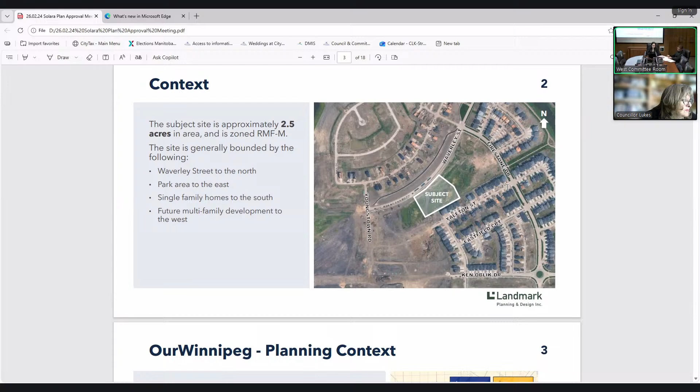Regarding some planning context, OurWinnipeg 2045 and Complete Communities 2.0 identified this site as a recent community, and there are several policies and objectives that support a project like this one. For example, expanding housing diversity while improving the efficiency of land use, infrastructure, and services, and encouraging residential development that contributes to the neighborhood character, among others.

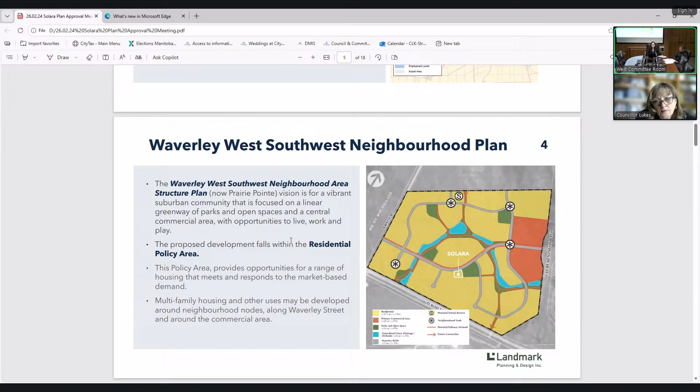This site is also located within the Waverley West Southwest Neighbourhood Plan area, within the residential policy area. I'm not going to get into the specifics for the interest of time, but the proposed development follows the policy for this area.

Now, regarding the site plan, the proposed development includes 12 townhouse buildings with a total of 59 dwelling units, all with single and double garages depending on the size of the unit, and an overall parking ratio of 2 parking spaces per unit. There is also an outdoor amenity area located in the center of the development, with enhanced landscaping and connectivity all across the site. We're also proposing a total of 9 visitor parking stalls, 4 of them accessible stalls.

All of the proposed townhouses are 3 stories in height. The ground floor is dedicated to the private garage for each unit. Vehicle access to these garages is provided directly from the proposed internal road loop, which keeps driveways and vehicle movements contained within the site. The main entrance to each townhouse is located on the opposite side of the unit from the garage, so these front facades face the internal pedestrian network.

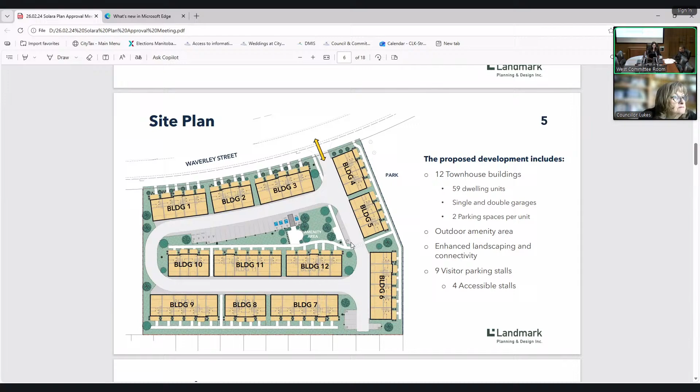Here we can see a zoom into the amenity area in the center of the development. We can see the common parking area, a space for 20 bike stalls, and a seating area as well, all connected with pedestrian paths.

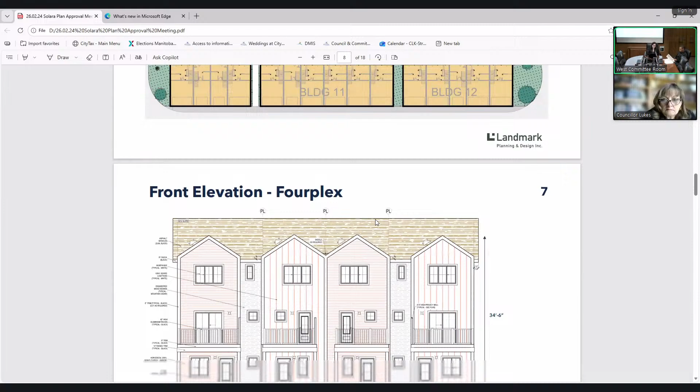Now, this is a typical elevation. This is for a fourplex, but it's very similar for fiveplex and sixplex.

The facade design incorporates durable and cohesive materials, including vinyl board and batten siding in white and earth tones, engineered wood siding in a cedar finish, black trims, black asphalt shingles, and 42-inch aluminum railings with glass panels for balcony areas, ensuring a modern appearance that is consistent across the development.

Also, for all the buildings, the proposed height is just over 34 feet. This is the front elevation. Here you can see the pedestrian access at the ground level, covered by a balcony deck in the second level, which is where the social areas are located, and then followed by a third level with 2 or 3 bedrooms, depending on the size of the unit.

This is an example of the rear elevation, where we can see the garage access at the ground level.

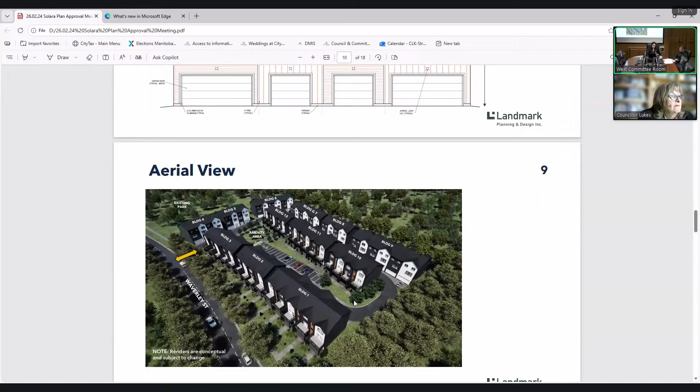And then the following slides show very conceptual renderings, just to give you an idea of the scale and general layout of the development. However, in this case, the surrounding context has not been detailed. This rendering helps to appreciate the height of the buildings, the road loop, the central amenity area, and direct pedestrian connection between the front units and the sidewalk along Waverley Street.

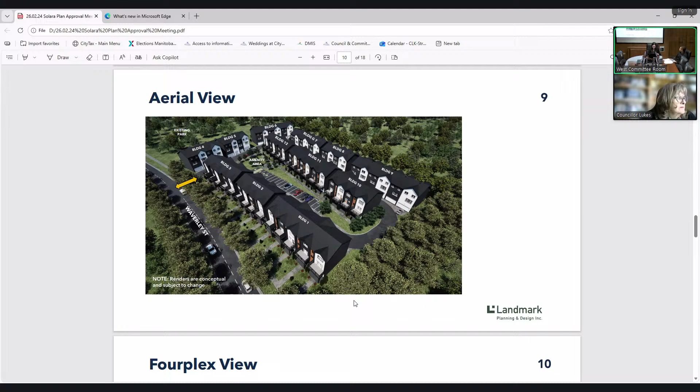This is a typical fourplex view. Here we can appreciate the combination of colors in the facade, the rhythm, the landscaping surrounding the entrance of each unit, similar for the fiveplex and the sixplex.

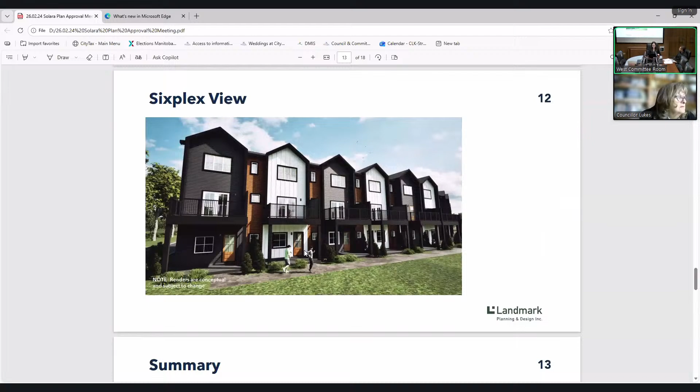So in summary, we feel this is a good proposal for the Prairie Pointe neighborhood. It adheres to objectives and policies of the city, is consistent with the vision and character of the surrounding neighborhood, introduces a housing form that expands the range of residential options in the neighborhood, responds to identified market needs and demand, and improves the public realm and strengthens access to adjacent neighborhoods through a pedestrian network.

And with this, I conclude my presentation. Thank you for your time. If you have any questions, we're happy to answer them.

The timing would suggest you've done this before.

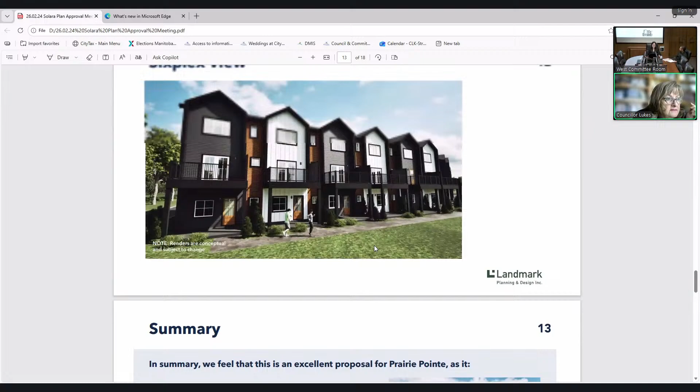Any questions from committee at this point in time? I'm just recapping the amenities section here. So what is it? Primarily like a little park, seating area, bike parking.

Yes, that's correct. The seating area with also an area for bike stalls and landscaping, trees, shrubs around it, connected with the pedestrian paths. Also, this path connected to this area crosses the street. The path continues and it takes you to the park to the east of the development. Right, which we can see.

Okay, no, I'm familiar with what you're wanting to do, and you've got little amenities in there. You've got good pathway connections to the park. It's nice design. Yeah, no, I don't really have any further questions.

This is exciting because it's another multifamily development in the Waverley West Ward. That is the fastest growing ward in the city right now. So, yeah, no, this is, I have no more questions.

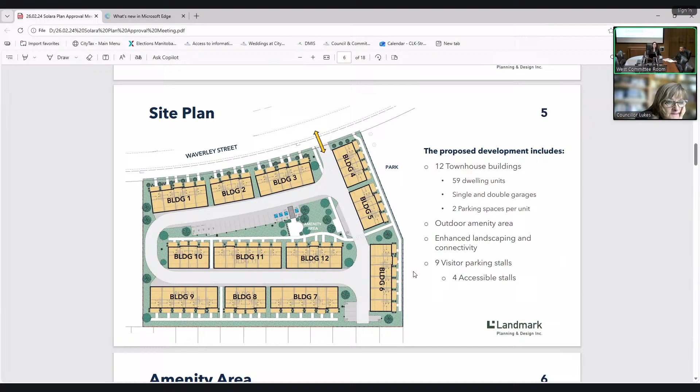Thank you. Councilor Dobson, one question. Does every building have a balcony? Yes. And they're all on the second floor? Yes. Okay, so they're not imposing on the neighborhood property because they're not very high.

And all the parking is not on the balcony side. Underground parking? It's not underground, it's ground floor parking, but it's a garage, just on the ground floor level. So in here we can see this is the ground floor level and these are the garage entrances.

Yeah, looks very good. Thank you. All right, no questions.

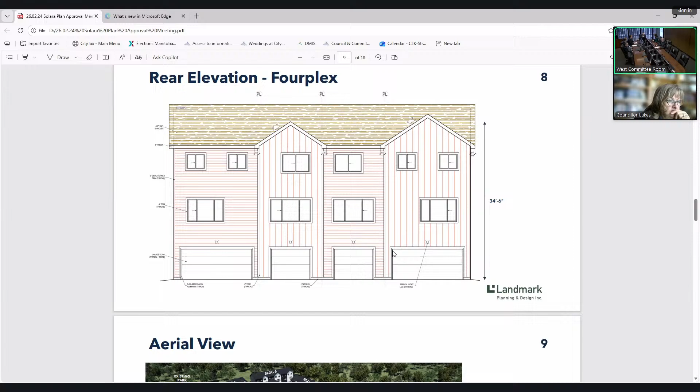So on the ground floor, the parking is at the rear of these buildings. So that would, I would presume, eliminate most of the first floor living space. Yeah, the first floor is mostly pedestrian access from the other facade, the front facade, and the garage. And then all the social areas are in the second floor, which is the one with the balcony, like a deck. And then all the bedrooms are in the third floor.

So when you say social area, I get that these are 4, 5, and 6 plexes, but each of the individual peaked areas is a contained unit. Yes. Social areas, I mean, just the kitchen, the living room. Thank you. So not shared amongst the entire? No. Yes, they all have their individual.

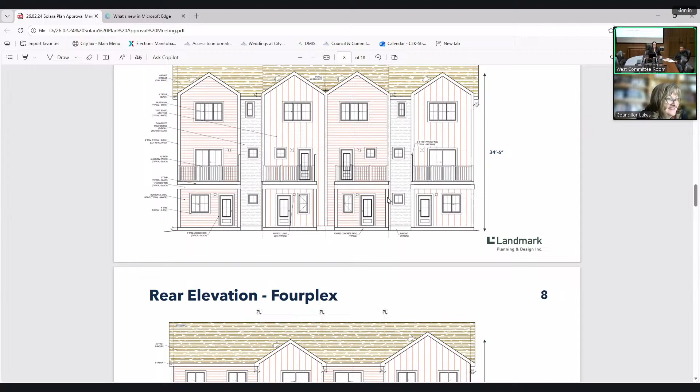Okay. Yes. All right. One big party room on the second floor. They're all connected. We can all join up there. Okay, and then just on the amenities, I see a seating area.

It's, I would assume, kind of like a rest stop area that you can sit at out front waiting for a ride or coming home from a bike ride. Is that the intention there? Not a congregating area?

Well, there can be some gathering there, but I think it's just to provide the opportunity to rest, and also it's in front of the parking, so also to wait for a ride.

I don't have any other questions. I'm not familiar with Daytona in my neck of the woods on this scale, but I have heard great things about them from other area councillors, so I anticipate this will be an excellent development as they have been across the city.